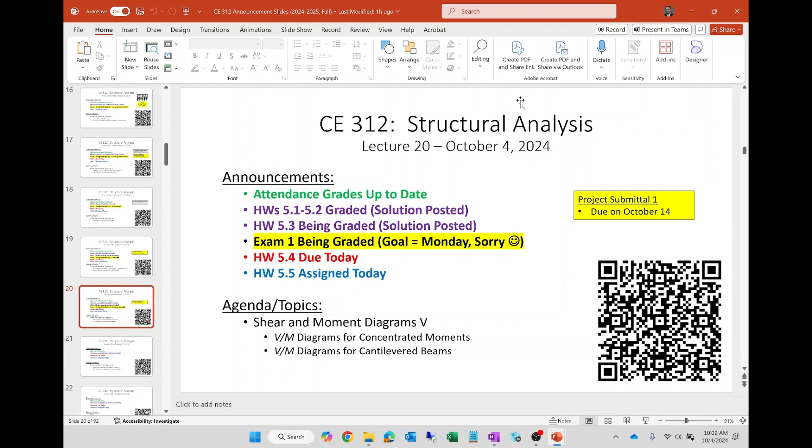Now look at these notes. How big? I was like... I get it, I get it. No, because you can tell on days that I'm conscious and ready to go, versus other days. Look at these drawings compared to like these. Oh, I get it. Is this gonna— you're gonna open AutoCAD again? It just depends on the day.

Look, this one's got fire. There we go.

I don't know if I'm in need for a new computer or whatnot these days. It's just a little slower and slower. This is a newish machine too, so it's not that old. Are you in the market for one? So this one keeps crashing, and I took it to IT. Yesterday at IT it stopped turning on, so I was like, oh, it's done. So I ordered a new one, but right now it's on and I'm not running anything, and my CPU's at 50%. Yeah, so that's not good. It's a Surface, I think it's a Pro 9. It's not that old, but I don't know.

All right everybody, let's get started. I'm just going to lean into it and say I'm sorry, I really wanted to get your homework or your exam graded by today, it just didn't happen. I think I'm about halfway done with it. All in all, it's going as expected, which is good. I think everything will be fine. But I do need to get them off my desk because I'm going to have two big submissions. One is your project coming up soon, and the other is I have an exam in statics coming up in the not too distant future, so I really want to get them off my desk. All right, so other than that, everything's good to go.

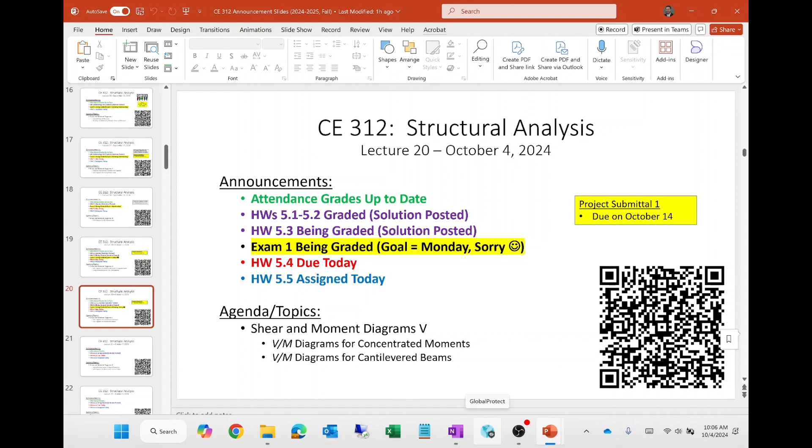And then after that we get into beam and frame deflection—that's going to be after this. Sound good? All right, so we got a little while before our next exam, if that tells you anything. So, okay.

I had some coffee go down the pipe and just can't get over it.

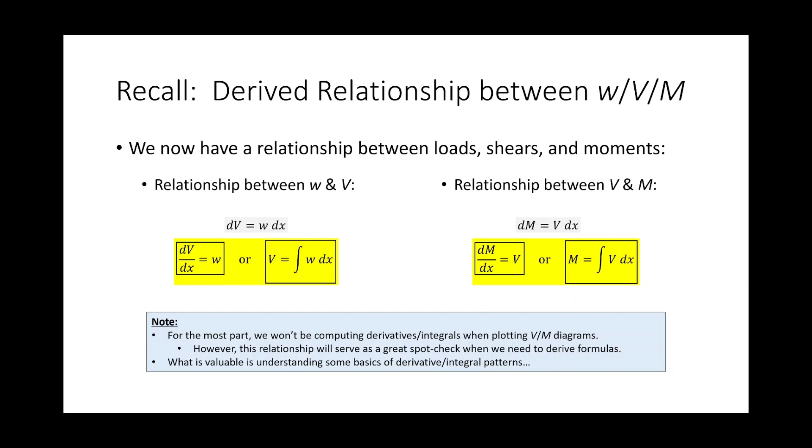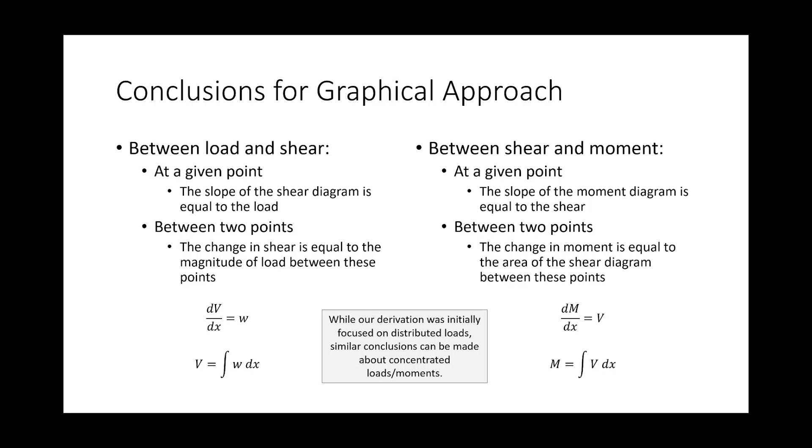So what we're going to do now is discuss shear and moment diagrams with beams that are subjected to concentrated moments. The same relationships still apply. Like in my shear and moment lectures, I throw these two slides in front of every lecture just to make the point that we're still using the same relationship, the same approach. Shear and moment diagrams subjected to concentrated moments, we handle them the same way. Nothing really changes except for how we consider the concentrated moment when constructing the shear and moment diagram.

The concentrated moment is just that, a moment. So when you construct a shear diagram, you ignore it. It's not a shear, it's a moment. But that's going to affect the construction of the moment diagram when we get to the integration side, because we've been summing up the areas and they've all been adding up to zero. This is where it changes a little bit, that's where this is going to be different. And for cantilevered beams, it's really not going to equal zero. The best way of illustrating this is to just go through it.

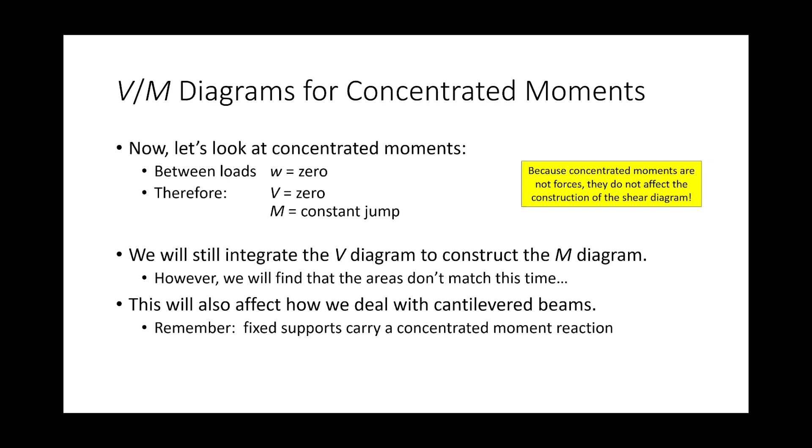So what I want to do is construct shear and moment diagrams for this example and this example. We've already done these examples in terms of computing the support reactions. We did this one a while back. Remember when we computed the reactions for this? You've got the distributed load going this way, the 10 kips times 45 going this way, the reaction going this way. And when we computed reactions, we just added 20 - it wasn't 20 times 35, it was just 20 because it already is a moment. Remember that? So we got this reaction and this reaction.

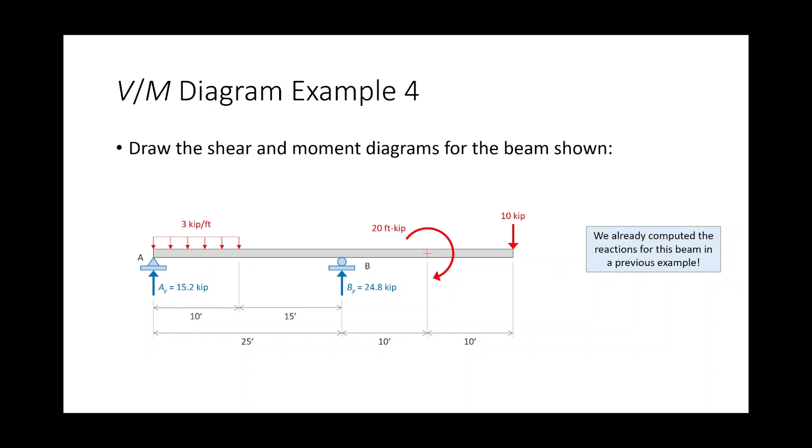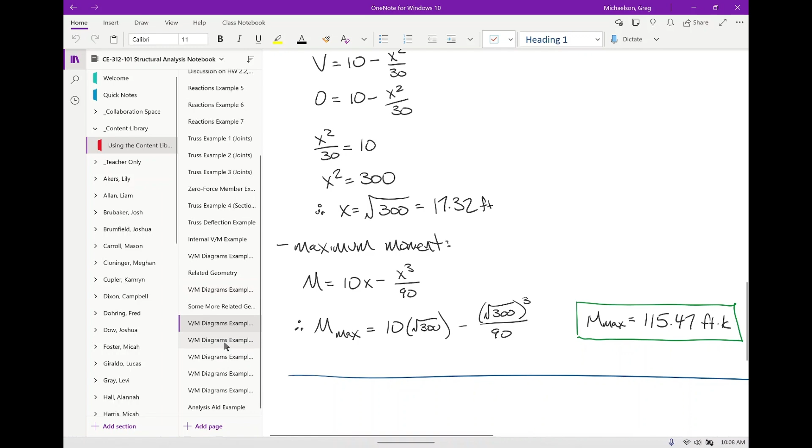Now let's actually use them to construct shear and moment diagrams. So let me open up the handy dandy notebook. Oop, that's statics. No IJK if you can avoid it, right?

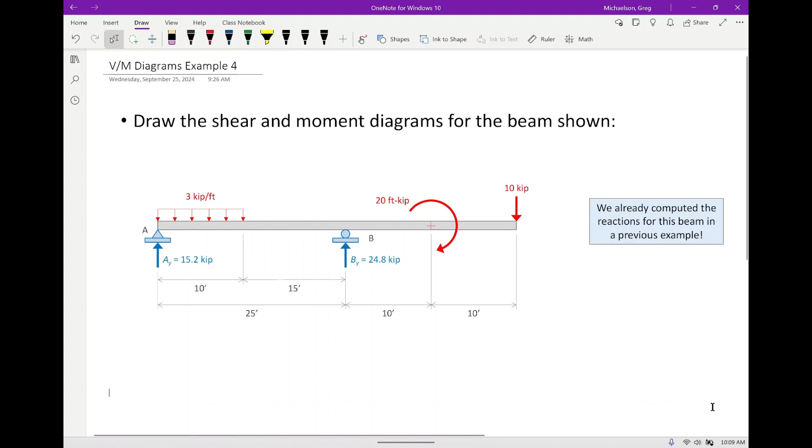So here's the beam, and what we're going to do is construct shear and moment diagrams for this beam. My overall point is that this problem is no different just because there's a concentrated moment present. It's just some of our intermediate calcs may require a second eye, I guess would be the best way of putting it. So I'm going to construct the shear and moment diagram the same way I've been doing all the other problems up to this point. I'm going to draw myself some guidelines.

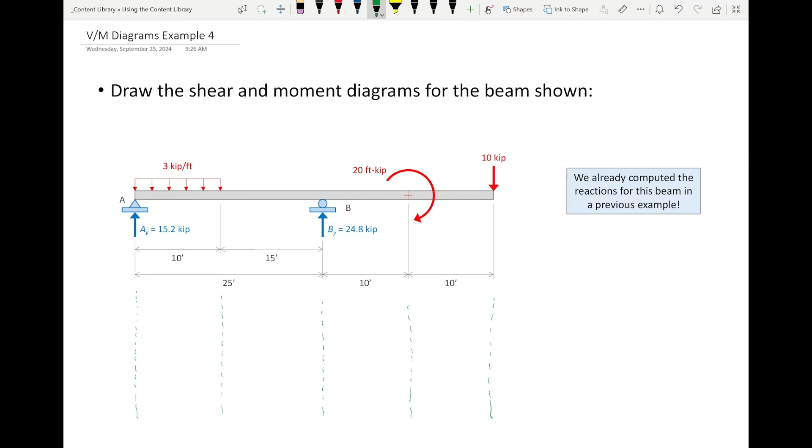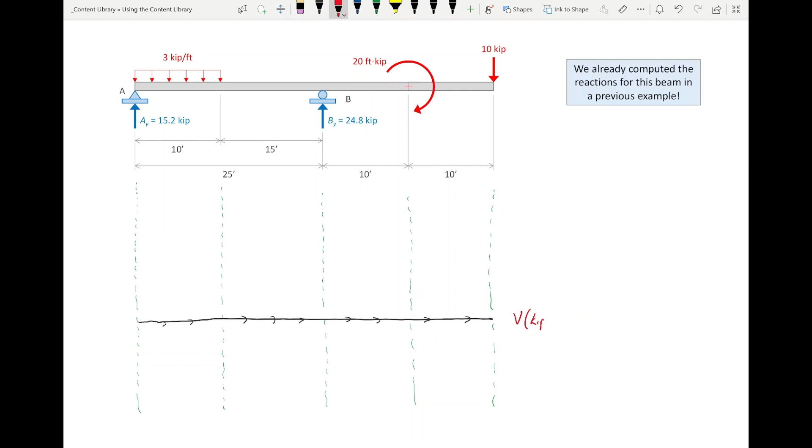Just to keep everything neat and tidy, let's strike our horizontal line for our shear diagram, and we'll put that about like that. Okay, again we're going to construct this the same way we've constructed diagrams up till now. If I start at zero, what's the first thing I need to do? Go up 15.2.

All right, so let's throw some letters on this. We'll call this point C, we'll call this point D, we'll call this point E, just so we have a frame of discussion. So let's go from point A to point C - what happens from A to C? Negative 3 slope for 10 feet, so it's going to be a linear path like this. If I'm at 15.2 and I go down, how much am I going down total? 30. So if I'm at 15.2 and I go down 30, that puts me at negative 14.8. So that's going to look about like that, and we'll call this negative 14.8.

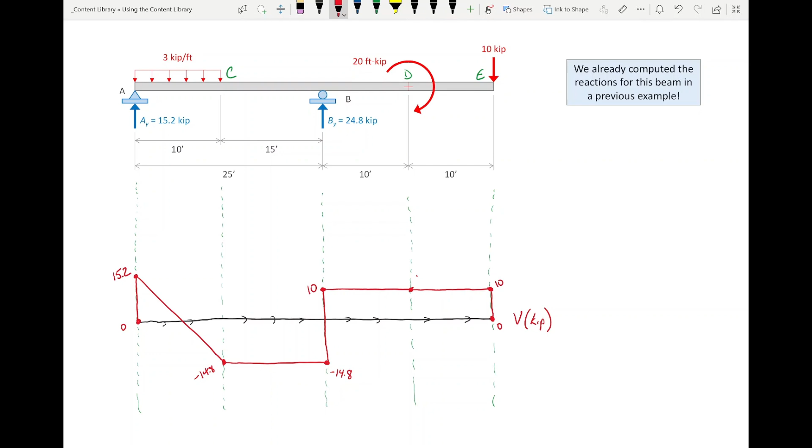To right here, and then I have a 10 kip load bringing me back to 0. And that is our shear diagram. So the big thing to keep in mind is that because it's a moment, it doesn't do anything. It just is what it is.

Okay, let's start doing some integration. And I'm going to split this up into separate regions. I don't really need to do it for the purposes of integrating the shear diagram, but as we're going to see here in a bit, it'd be kind of nice to split these up when constructing the moment diagram.

So what's the area of this? 10 by 20, 200. Well, 200, or 100 and 100, right? Yeah, okay.

What about this rectangle right here? This is 14.8 by 15, this rectangle right here. 222. Do I have a second? Second. Okay.

All right, now here we've got this triangular region here. So if we want to integrate this and integrate this, we've got to figure out these distances, right?

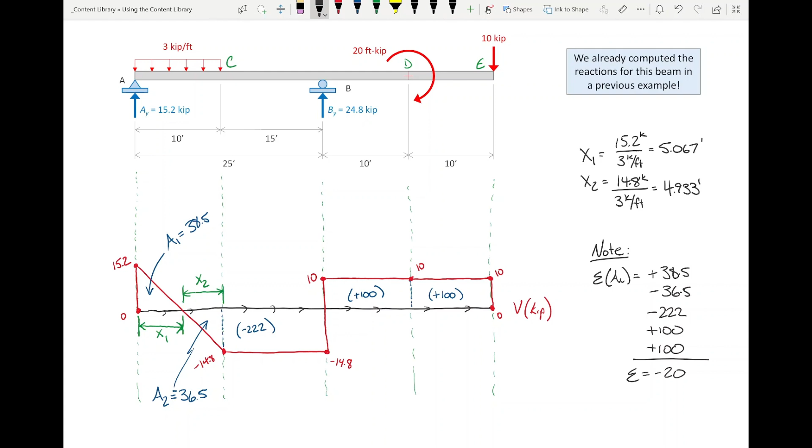If that makes sense, then let's go ahead and construct our moment diagram. Okay, and we'll do about like that. I can do better now. I don't know if that was better, but that's close enough.

Okay, so this is going to be our moment diagram. One thing I'm going to do is add another guideline right there, because this is where the shear is zero. So if this is where the shear is zero, then I'm probably going to have some sort of peak value right there. Let's see if we can construct this thing out. We'll call this, I don't know, point F, since we already have A, B, C, D, E. Let's call this point F.

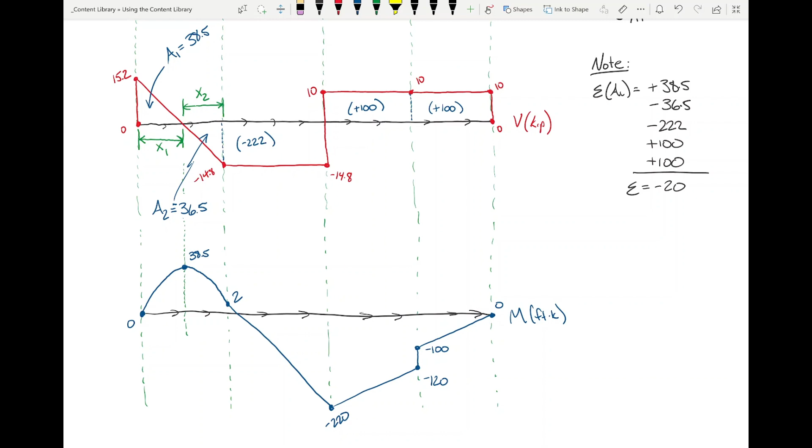I'm hoping that before we started this unit on shear and moment diagrams, if I had started with just this problem and said construct the shear and moment diagram, it would have seemed scary. But I'm hoping now it's not. It really isn't, it's just the same thing as everything else. We've got concentrated loads, distributed loads, concentrated moments, overhanging beams. It's really not that hard. It's the same process, okay? Does that make sense? Any questions on this problem?

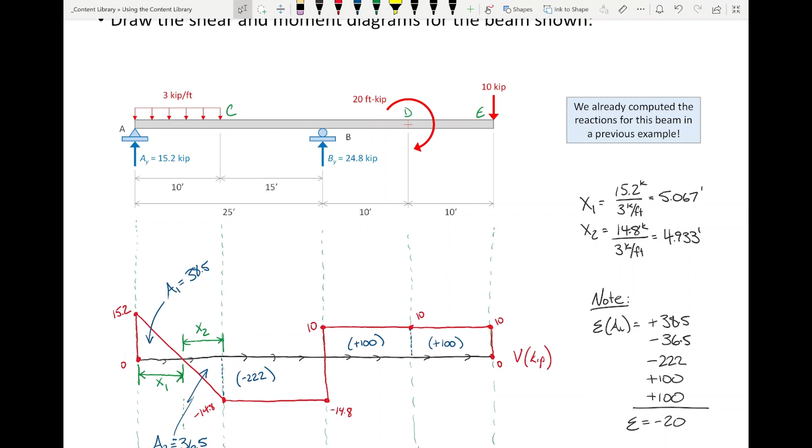Okay, let's do our next one.

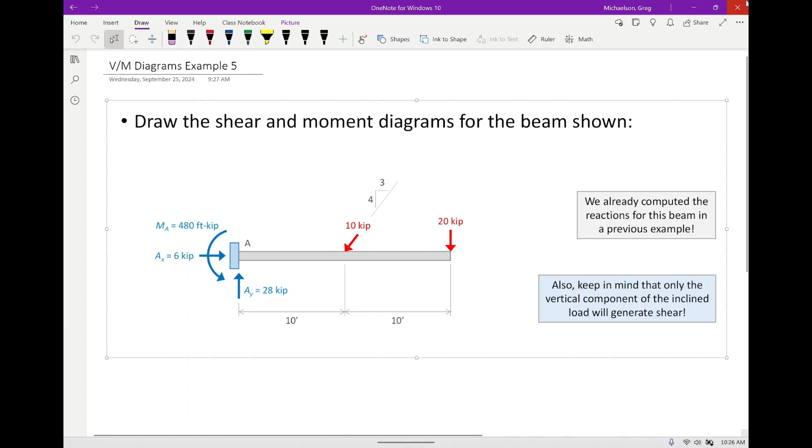So this problem is a cantilevered beam. We haven't constructed a shear and moment diagram for a cantilever beam yet. But I'll tell you that the construction of shear and moment diagrams for cantilever beams is probably one of the easiest problems that we do. In fact, cantilever beams in general are typically very easy problems. They really are in structural analysis. They are among the easiest problems that we can come up with. I'm usually tempted to not put cantilever beams on exams because they're so easy. I didn't say that.

You're like, well, thanks, Dr. Mike. No, I mean, in all seriousness,

There's not a lot you can do to introduce challenge in a cantilever beam problem, just because of the nature of the analysis. I'm giving you the reactions here, but we already did this—we computed reactions for cantilever beams a long time ago. One of the things we found with cantilever beams is that because all of the reactions are collected at a common point, you don't have to be strategic like you have to be with simply supported beams, where you sum moments to solve for one reaction and then sum verticals to get the other. You don't have to be that way with the cantilever beam, and we were able to get all three.

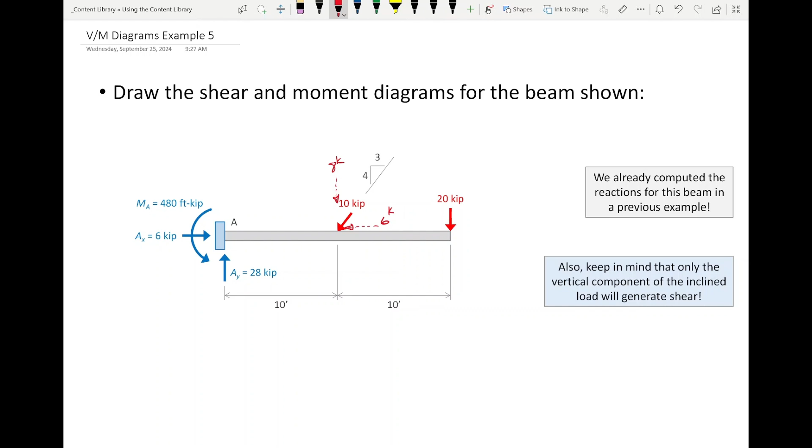So if we wanted, we haven't been doing this, and I think some of the homework problems have mentioned this, an axial force diagram. Have y'all seen this in the textbook? If we wanted to draw an axial force diagram, maybe what we would do is draw it like this—6 kips in compression in this region and then nothing else, right? So we haven't really been talking about that, and a lot of times we don't really even need to.

For example, for trusses, what would the axial force diagram look like for a truss member? It would just be 50 kips in compression or 80 kips in tension across the whole member. It'd be pretty boring, right? It would just be a constant value everywhere, which is why a lot of times when we did truss analyses, we didn't draw an axial force diagram. We just said that member has 40 kips in compression, this member has 30 kips in tension, this is a zero force member, and that's all we needed. So if we wanted to draw an axial force diagram, it would probably look something like that. I just wanted to throw that out there.

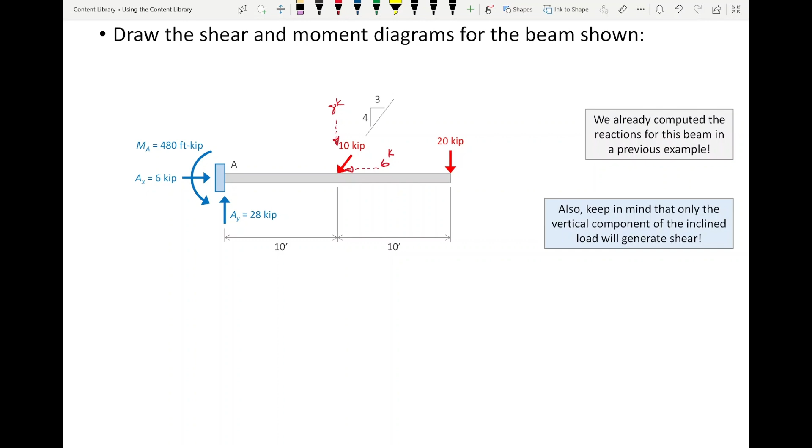But the other reason I wanted to mention that is when I'm drawing the shear diagram, which do I need to be paying attention to—the 10 kips or the 8 kips? The 8 kips. The shear diagram is a reflection of the change in vertical forces. The 10 kips is not acting vertically, it's acting at an oriented angle. It's the 8 kips that's acting along the y-axis. So that 10 kips sort of doesn't exist for the purposes of drawing the shear diagram.

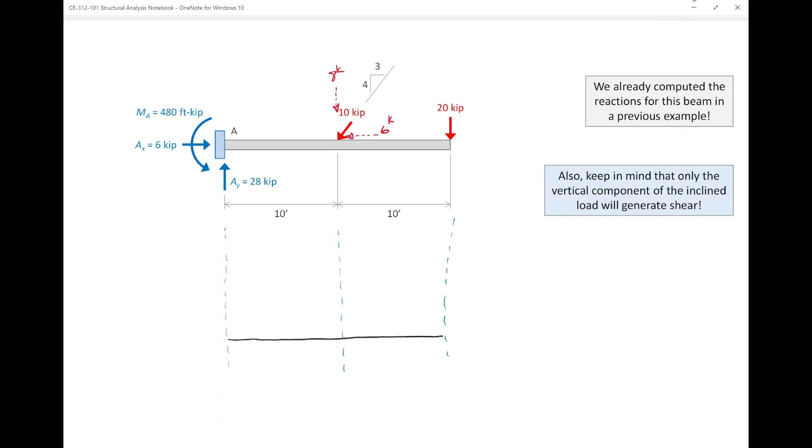Okay. Actually, hold on, let me make that a little lower. Okay. Oh man, I can do better with that. It just did not look neat.

Okay, so this is my shear diagram. Let's draw my shear diagram. I start out at 0, okay? Tell me what to do.

Up how much? 28. Okay, so you're telling me to go up 28. Why aren't you telling me to go up 6? Or why aren't you telling me to go up 480? Why are you telling me to go up 28? That's the force in the y direction. So we're ignoring everything else. Okay.

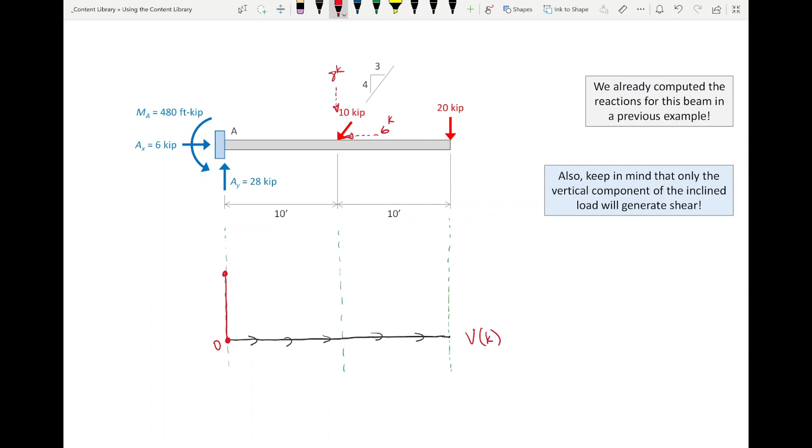So let's put some letters on here. What happens from A to B? Nothing, right? So from A to B, we have absolutely nothing.

Tell me what to do at point B. Down 8. Say it again. Down 8. Down 8. So if I'm at 28, down 8, that's going to put me at 20. From B to C, what do I do? Nothing, just horizontal. And then back to sea level.

Now, does anybody see a problem with what's coming next, integrating the shear diagram? It's never going to go back down, it's only going to go up. We're only going to have positive area. This is the first time this has happened — we haven't had a shear diagram without any negative area. It's always had some positive and some negative, and it's always balanced out, at least until today. This is way off the beaten path.

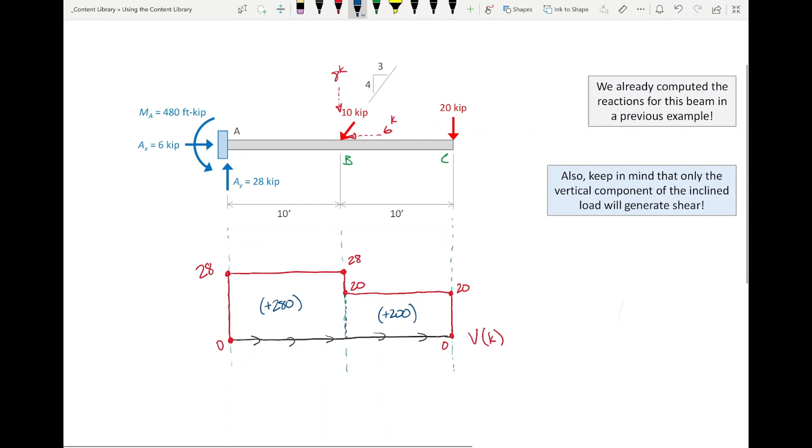So now, when we construct our moment diagram — and I'm kind of revealing what's going to happen with how I'm doing this — I start at 0. What do I do first? Go straight down, I drop down 480. The reason I'm dropping down 480 is because these areas are going to bring me back up to 0. Does that make sense?

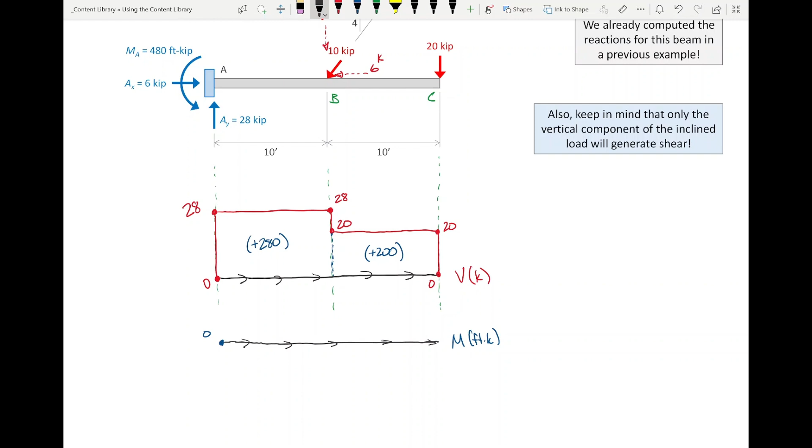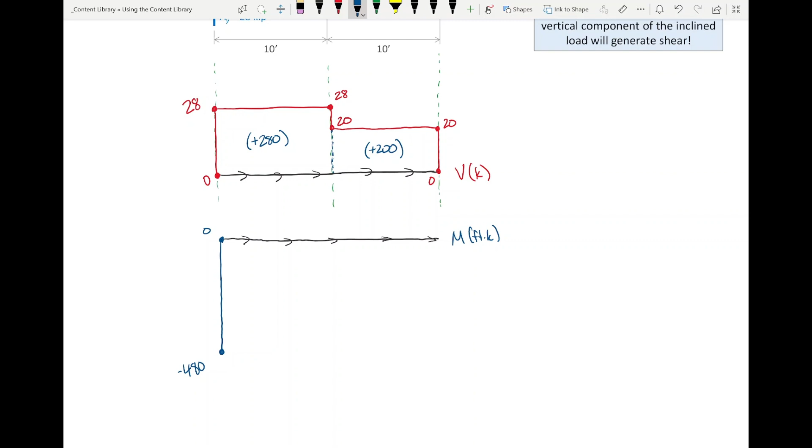So I'm going to go down, and then from 480 go up 280. So it's going to put me about right here at negative 200. Let me give myself a little more room. So it's going to go like that, and then like that, right? And that's our moment diagram.

Like I said, they're easy, they really are kind of easy. Next time we're going to have some fun, because we're going to deal with an internal hinge. Once everybody's got this, I'll show you the problem we're going to solve on Monday. Actually, since we've got a little bit of time, let's go ahead and do the indeterminacy stuff so we're not rushed, because it will be very quick and I don't want us to be rushed on Monday.

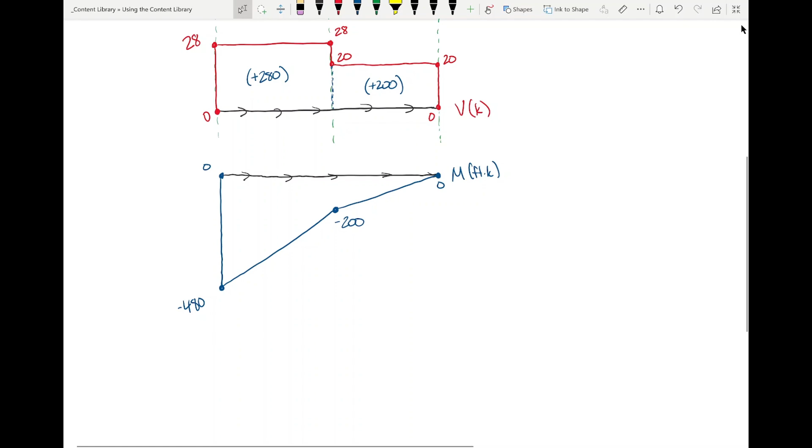So M plus R — R is the number of support reactions, right? We have M. Why do we have one unknown for every member in a truss? Because truss members only carry one force, an axial force. They either carry tension or compression, but there's only one force in the member along the member's axis, and tension or compression is really just a sign, positive or negative. Okay, and then why is it 2J?

Why is it 2J for a truss? Why is that the number of nodes? There's X and Y forces, so there's no moment at a truss joint. Trusses are a special class of structures where we've made some assumptions, and baked into those assumptions is behavior that results in members that carry no shear and no moment. It results in a joint analysis that has no moment. So when we classify a truss, really all we need is M plus R minus 2J.

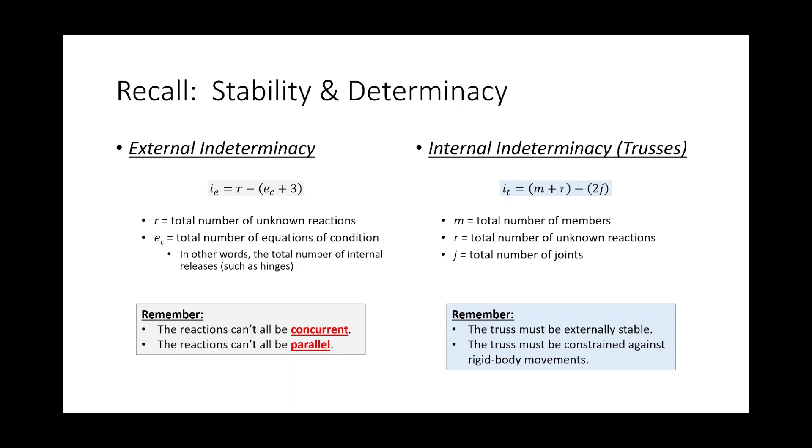Remember, if you have a member and you cut it with a samurai sword or lightsaber, you could have an unknown x force, unknown y force, and unknown moment.

So for every member, there is at most 3 unknowns. So the unknowns in the analysis are 3m plus r: 3 responses for every member, and then the reactions.

What about the knowns? Why is this number 3 instead of 2 for the joints? Because beams can carry moment, right? Frames can carry moment. That's the difference between a truss and a frame. Frames are just beams connected this way and this way. So in a frame, that connection can transmit moment.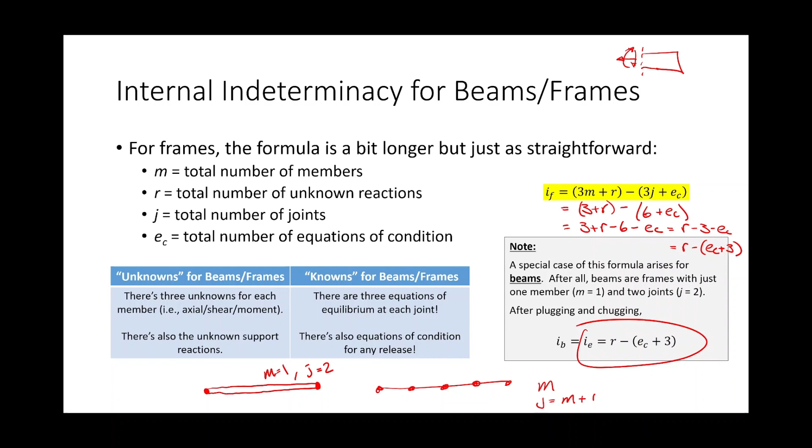So what we're going to do next time is handle internal hinges. And here's the funny thing—I love this slide because the question I ask is, how does the presence of an internal hinge affect how you construct a shear and moment diagram? And the answer is, it doesn't.

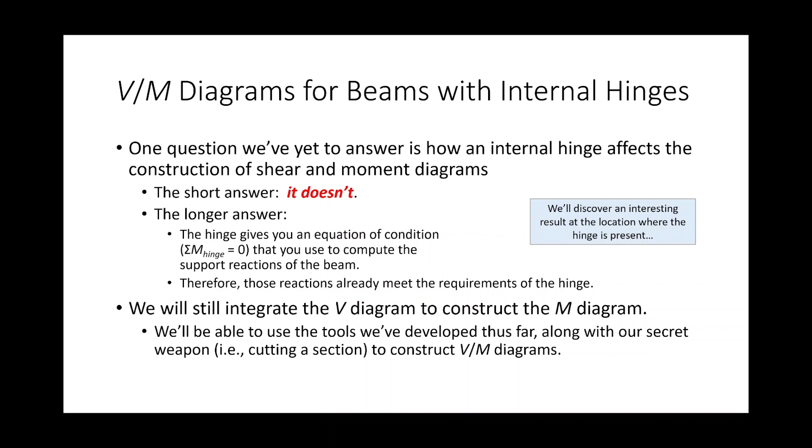Here's what an internal hinge does: it provides a specific known equation of condition, and we use that hinge to compute the support reactions. Then we just use those support reactions to construct the shear and moment diagram. If you do everything correctly, you'll find an interesting result on your moment diagram where that hinge is. We're going to explore that Monday with this example—I didn't give you the reactions, so we'll do it start to finish: compute the reactions, use the hinge, draw the whole thing.